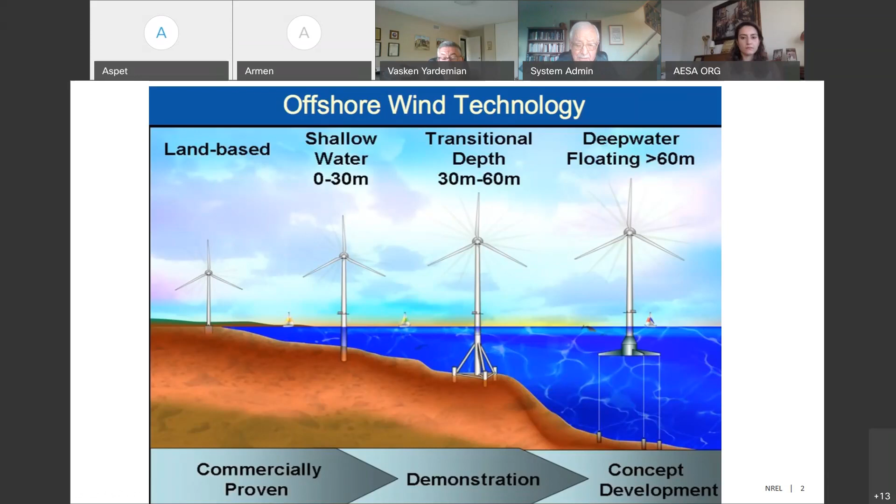And that's what I'm going to focus on. Before I do that, here is a simple introduction to what a wind turbine is like. Notice that it has several parts: the tower, and then there's a nacelle. This is called a nacelle, which contains the rotor, the gearbox, generator,

and the new ones have in them power converters and also transformers. They can fit in there. I'm going to show you a picture which would absolutely floor you how big these things can be.

Then, of course, there's the hub, as you see, and the three blades. The blades are airfoils. They use lift to turn. They turn at between 30 to 60 RPM, rotations per minute, which has to be increased. That's why you need a gearbox from 50 or 60 RPM to what the utilities want, which means 1500 or 1800 RPM. So that's basically the essence of the wind turbine, both onshore and offshore.

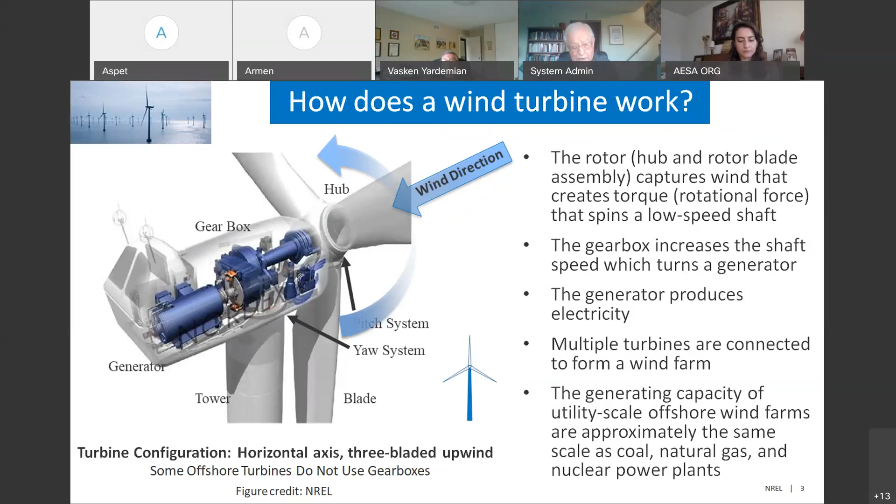So that's the first picture. Now the next one is really another tutorial. Look at the waves here. I'm not going to talk about waves. I bet you're going to ask a question. Keep that in mind. What do waves do when you put these turbines

offshore? Power in the wind is the cube of the velocity. This is the line. In other words, when you turn it on, when the rotors turn it on, the V cube takes you up to a point where you have what's known as the design feature of that particular turbine.

At that point, the blades change their pitch and, instead of increasing the speed, they remain constant. So the curve goes all the way to the end, and then if the wind gets too high, it cuts off. So the rated power, in this particular case, is 6 megawatts. At 6 megawatts, the pitch control comes in, holds things more or less constant until the very high winds, after which it gets cut off.

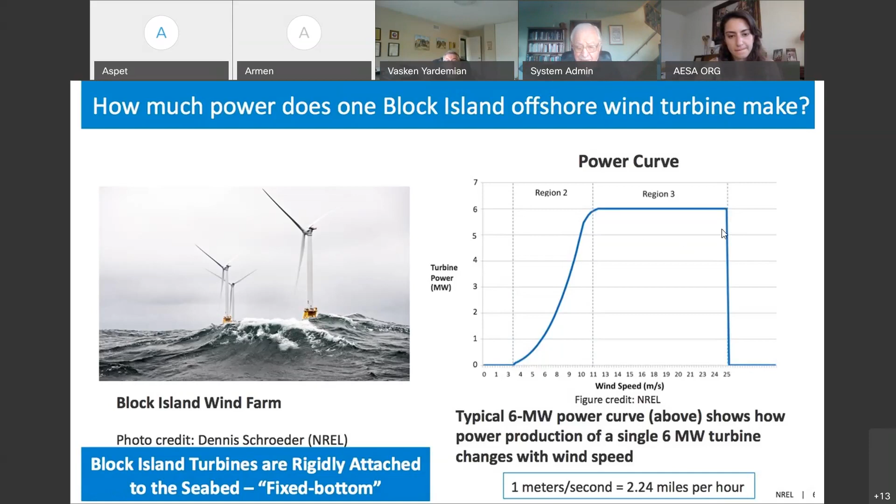So that's basically the feature of the wind: cube of the velocity, and also the area of the blades, directly in the area. So you multiply those two and you get your power in watts, kilowatts, or megawatts. So that's kind of the basics. Now this is a slide which shows what's happening in the United States.

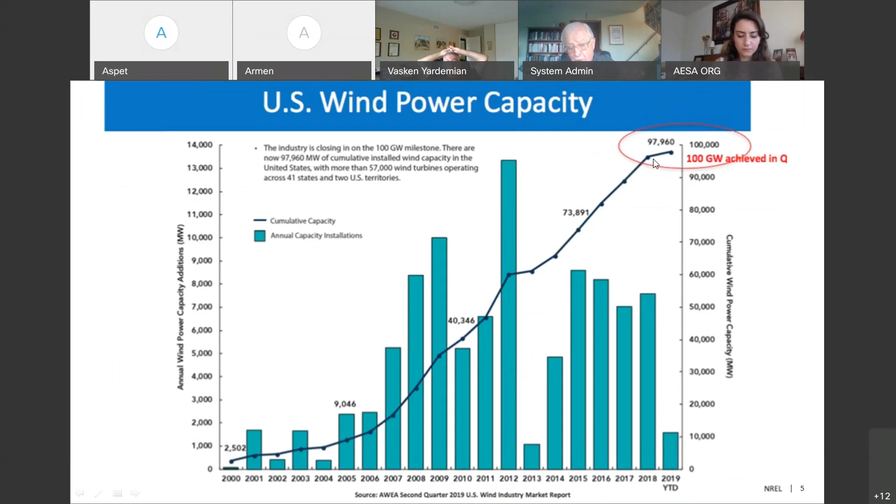The bar charts are annuals, but the curve is cumulative, and it goes almost to 100 gigawatts. That's where we are today in the United States, which means a lot of effort is going on. This is both onshore and offshore combined.

But we always have visions. Wind energy supply in the US could go to 20%. Right now it's close to 8-9%. By 2030, it probably will be 20%. And who knows, thinking big, by 2050 it could be 35% of the electric demand of the country. That's the vision we have.

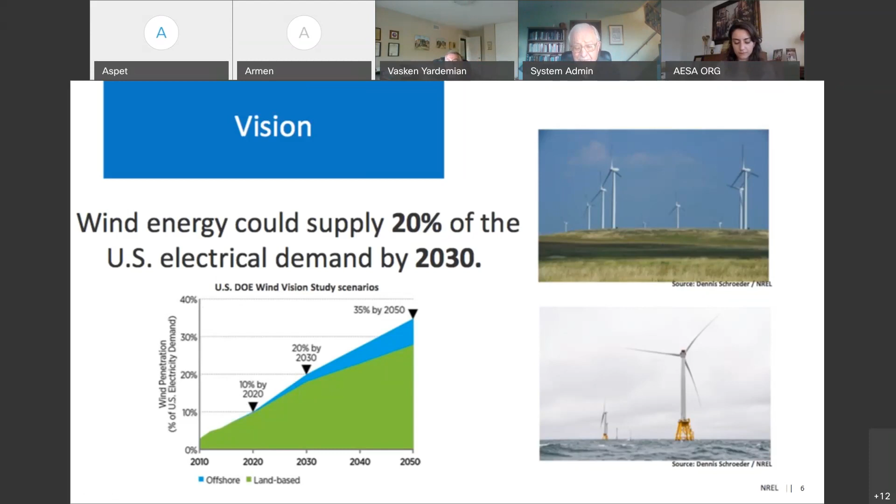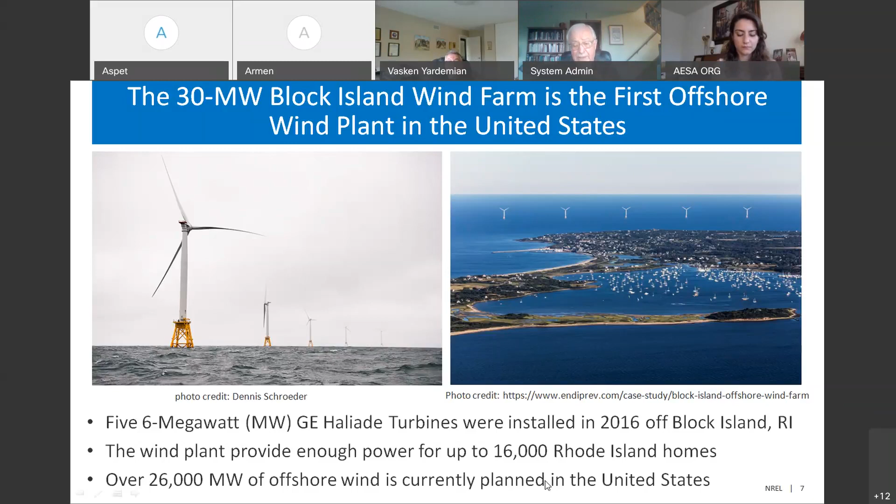Here is where the real interesting story starts: offshore. Onshore is simple and easier to do. Offshore, you've got problems to think through. The simplest is fixed bottom offshore. You fix a monopile into the seabed, or use a 4-legged jacket, and those are cost effective.

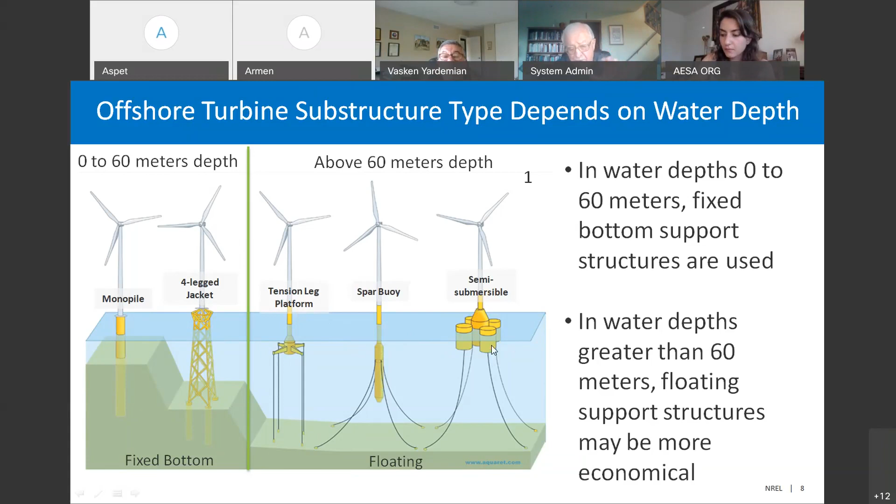But when you go further, to 60-meter depths, you cannot use fixed bottom. You have to use floating, and that's where the fun comes. There are 3 different types of systems to float these turbines. One is called TLP, tension leg platform—I'll show an interesting example. Another is huge spar buoys with tremendous buoyancy, and then the semi-submersible. These buoyant forces keep the heavy, big turbines up and steady, and we'll see how this goes.

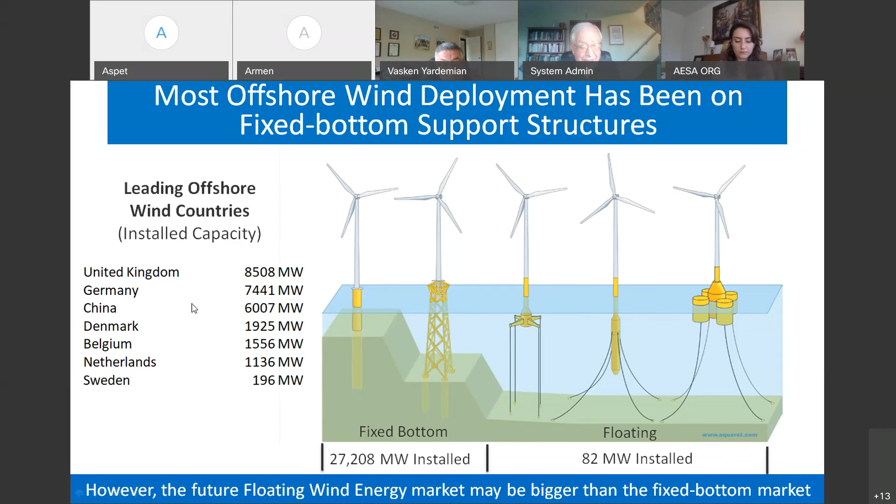Things are going so fast—these numbers came to me 6 months ago and they've already been updated, all of them. That's how fast things are going. There is right now 27,208 megawatts fixed bottom and 82 megawatts floating installed in various countries, and I'll show you where they are. Look at the numbers—Germany is very strong, one of the leading countries in wind farms.

This slide shows the coasts where your winds are steady, more or less, with minimum or average speeds of 7 meters per second, proper for generating electricity cost effectively. All countries, all continents have coasts, and this shows where some of them are going. Interestingly, 80% of offshore wind resources are in waters 60 meters or greater—that's where floating systems come in. This technology will be completely deployed within 4 years; in fact it's already being deployed, so it probably will be closer to 2023 to reach the targets we're looking at.

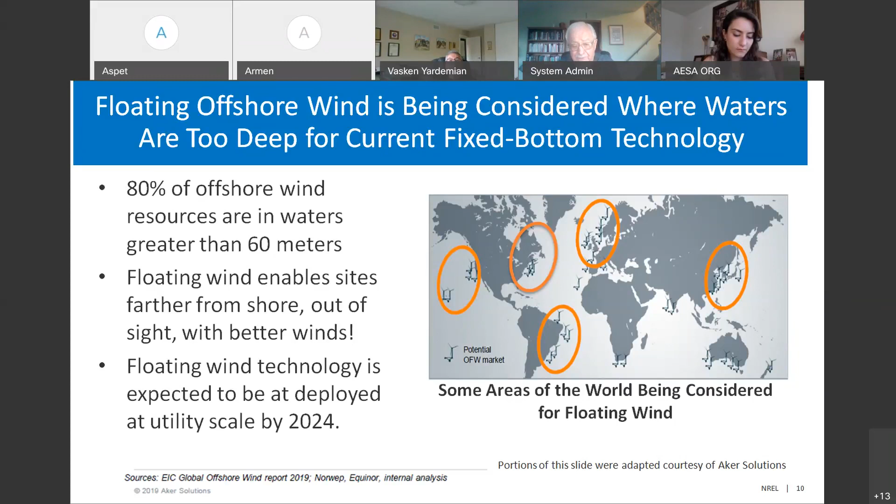This is a US wind resource map, and the colors show wind speeds—darker color means higher speeds. You want higher, steady wind speeds. You see the shorelines have dark blue, where wind speeds are enough to make it cost effective to put wind turbines. The rest of the colors show turbines used in various onshore places.

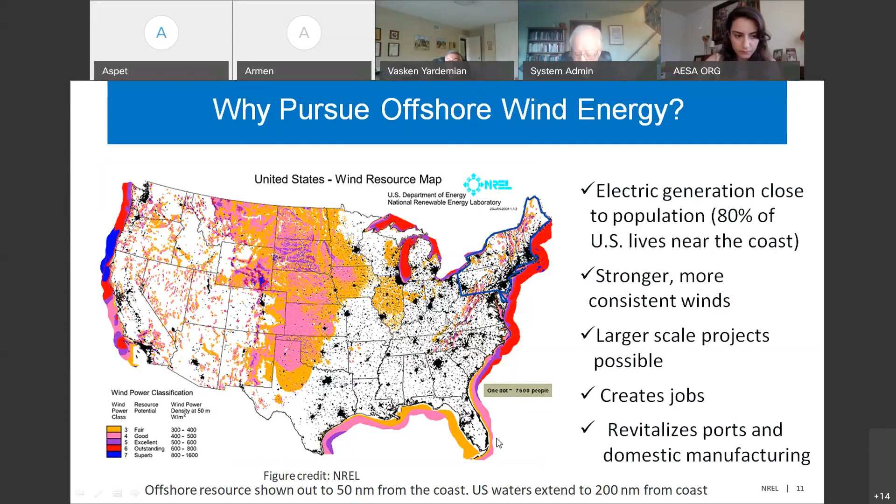Now let's look at offshore. The best location is south of North Oregon and Washington State, and even better ones are on the East Coast. These very dark areas show 10 meters per second or more—remember the average has been selected at 7. Actually, some turbines are set at higher speeds because they're steady and maintain that speed year round. That's how you do your selection.

You have to be very careful where you locate your wind farms—that's the first and most important thing, finding the best location. You don't want to go too far into the ocean because it's expensive; you want to stay within 60-meter depth, which is about 200 feet—you wouldn't want to go too much beyond that. One of the most important components of the wind turbine is the blade. These are airfoils.

What you see here, in 1980, this blade was really a wing of an airplane that created lift and rotated at speeds 50 to 60 RPM. Since then, there's been a major development: much more slender, better designed blades that do two things.

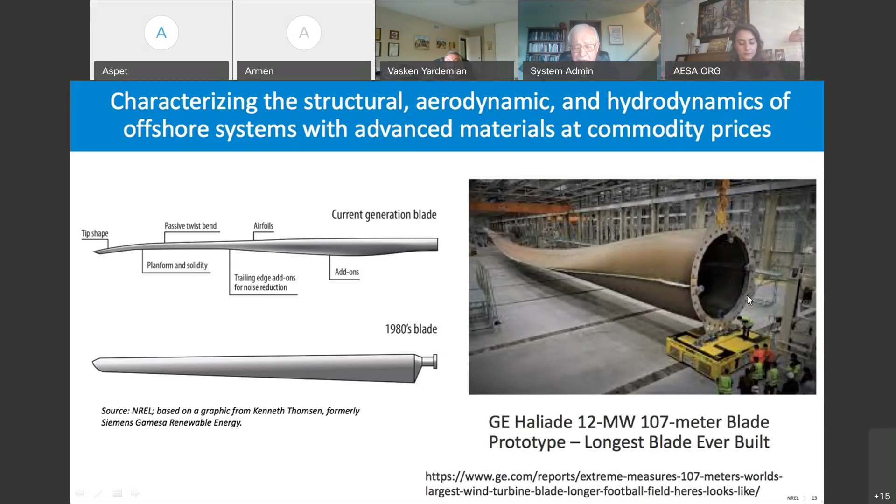the sea. That's one of the reasons I'm going to mention again - that offshore is the direction these big turbines are going. The transportation is very hard on land for those big ones.

Okay, this is kind of a repeat. You have the spar buoy, you have the submersible type, and then the tension leg type. All of these are used as they put these wind turbines at sea.

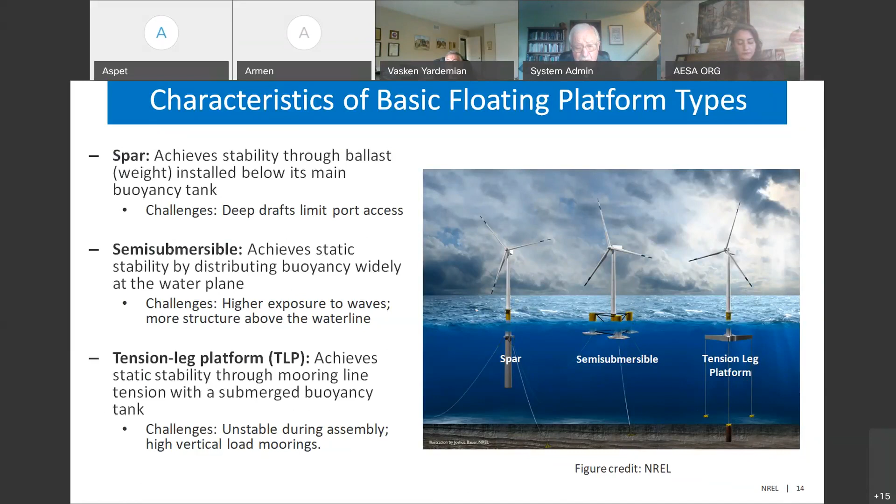Now, this is very important. You have already seen the oil and gas rigs that float. What they float on is precisely the same thing the wind turbines have, much smaller. It's very nice in knowledge transfer - you didn't have to do a lot of work on that because it's already been done with oil and gas rigs offshore.

Then inside the ocean, of course, you have your turbines. I see the turbines here - they usually carry 66 kV. These are dynamic cables that go to a station here. There's an anchor involved and the floating support. So this is roughly the inside of a wind farm.

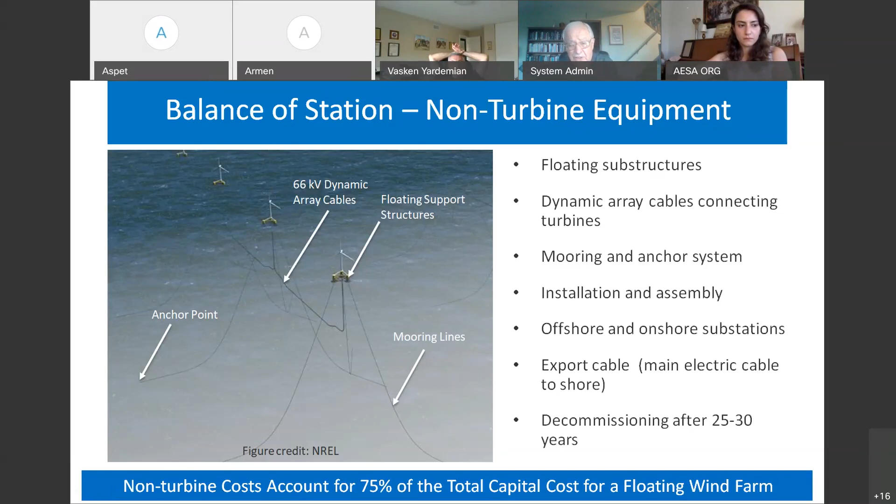These wind farms offshore, remember, can be as many as 80, 100, 150 turbines. And so the electrical connections and the power load and all that is a whole different science of wind turbine, which has nothing to do with the turbines themselves - it's basically an electrical problem that you have to deal with.

Now here we are. What is the cost breakdown of floating offshore wind systems? I'm not going to tell you how much they cost - you can put that in your question, we can discuss that. But here is a good breakdown. Notice that the turbine itself is only 24%. 25% is the substructure, the foundation, the floating - all that costs as much and slightly more than the turbine itself. Then there are the other problems.

The electrical infrastructure is 18%. Assembly and installation, which is another interesting topic, we'll leave for the Q&A - how do they erect these things in the ocean is really fun to watch, and it's really a science now. And then a lot of incidentals that make up the cost of a single offshore wind turbine.

Okay, now let's look at the bottom of it. You have to anchor this - the floating part is here, but then you have to anchor it so it won't move away with the waves. And the anchor, look at the anchor here - this is a regular heavy anchor which ships use, and it goes deep into the

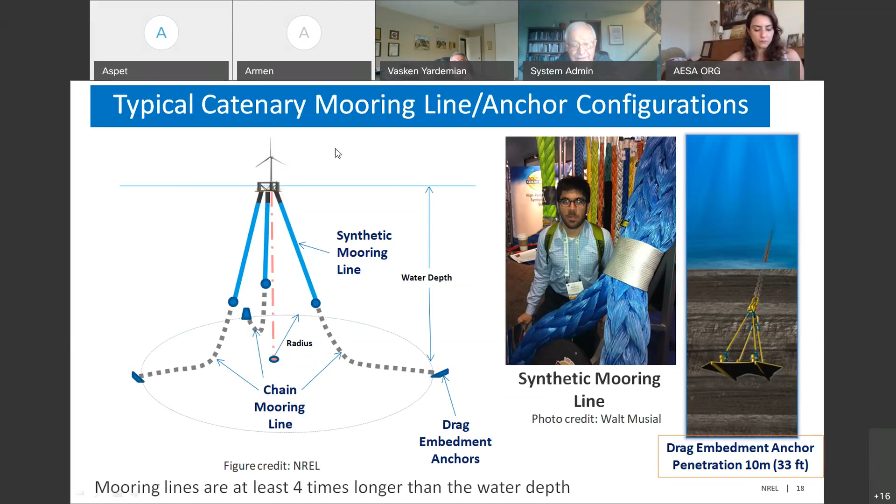seabed to hold everything firm. So the top part is synthetic mooring line - here's a polymer used for that. And then the other is chain links with anchors, 3 anchors. Now, all this length is longer than the depth, and I'll show you why that's the case.

We're setting up a turbine. This is just a schematic of a wind farm. Here is the wind farm and how you connect all the turbines, bring it to an offshore substation platform. From there, you send it to a 115 kV cable onshore and then connect it to the utility. Utilities are very much interested in integrating these turbines into their system.

This slide is a little complicated. This is what Vahan Gevorgian created, and he won a prize for it - a controllable grid platform. How do you control intermittent and changeable inputs from renewable energy like wind, solar, and so on, and connect it to the grid? He came up with a system which is classic, and it can be used anywhere for utilities to check against whatever wind farm they have to connect to.

This particular one shows 4 wind turbines. You use the solar PV system and 2 battery storage systems, because sometimes you have to store your energy.

This line here is the utility line. The Xcel is a Colorado utility system. The red is the test one, and you combine them. You get the input from all these and match it against what the utility wants, bring it to a switch, then connect it to the Xcel utility.

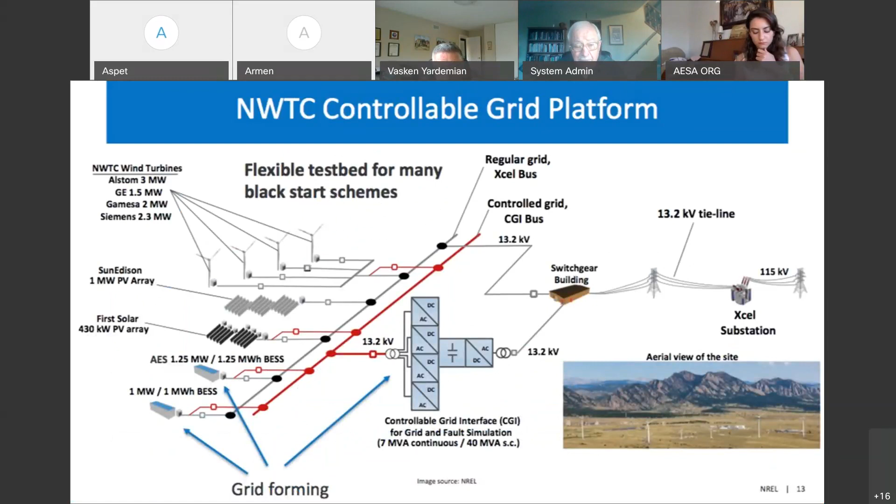The lower picture here is our NREL wind turbine test site. All wind turbines come here for testing, not the very big ones. The biggest, I think, is 3 megawatts for NREL. That's all I'm going to say about this, because this is a whole presentation of how you do this. If you're really interested and have good electrical engineers, you would love to hear my wonderful friend Vahan Gevorgian, and he will be glad to oblige.

Now, one of the many problems you have with wind farms is, how do you space them? Here is a sketch, which is not quite correct, because what you want to do is stagger them. There's a special distance you keep between turbines, but then the next set is staggered, and so on. The rule of thumb is that if this is the first turbine, the second turbine should be 6 to 8 rotor diameters away, so as not to interfere with what this wind turbine is producing. So arranging a wind farm itself is an interesting engineering project to work on.

You don't want them too far from each other, because then you have to spend a lot of money on high-powered cables going from one turbine to another. So it's a cost-effectiveness study: how close you can bring them so they won't interfere, and how far you can place them so they stop interfering with each other.

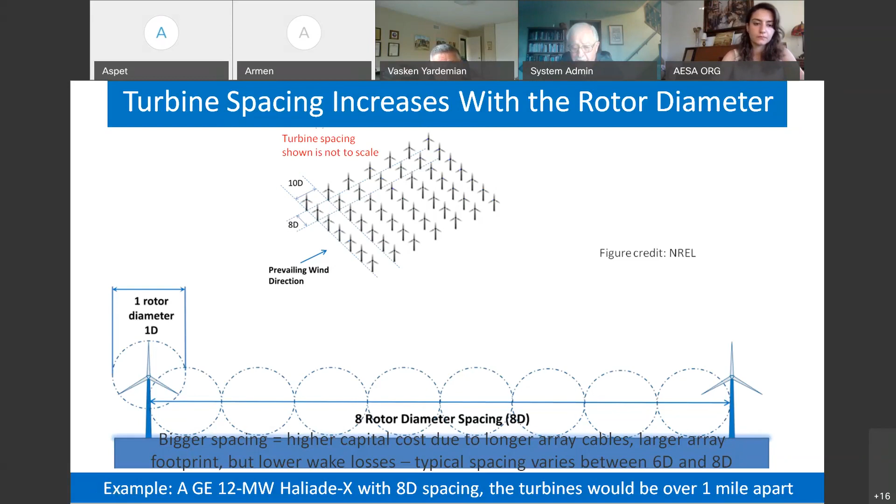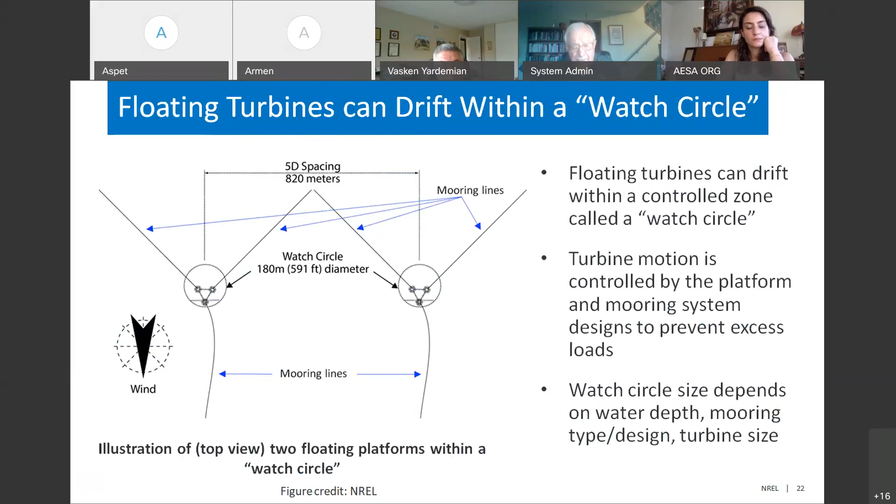Interesting problem. The next issue is you want these turbines to move a little bit. It's called a watch circle. It's a 180-meter diameter circle, so the cables are made loose enough that the turbine can move in a diameter of 180 meters. Almost all offshore wind turbines have this special part, and the mooring lines are made to allow this kind of motion. You don't want to go more than that, but that's about the amount.

Then all these turbines send their power to the substation in the ocean, mostly the ocean. The wind farm collects the power, they're floating, and then they transfer this onshore, which then connects to the utility. That's roughly the picture you face.

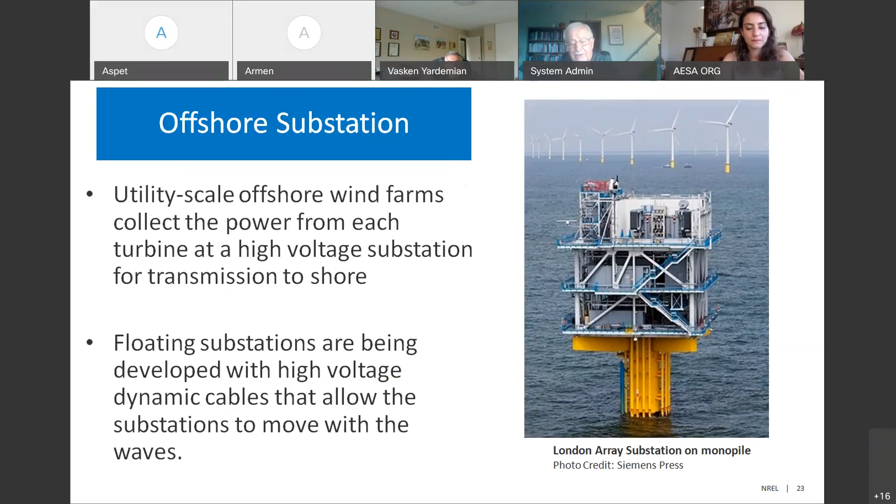All right, next is operation and maintenance. All of these turbines require operation and maintenance. At sea, you have a tugboat that comes, and a special ladder, actually mobile, that goes all the way up to the nacelle to do anything outside. To do inside, there's a door. You go inside, and there's a crane that takes you up to the top of the nacelle, and you can work on the generator, you can oil it. It says here: sensors, computers, lubrication, electrical, preventive maintenance.

All is done on site, but if there's a major repair, then you have to take the whole thing on a tugboat and carry it onshore for work. Hopefully not much falls in this category. Incidentally, these turbines are built to operate 20 to 30 years. Keep that in mind, 20 to 30 years.

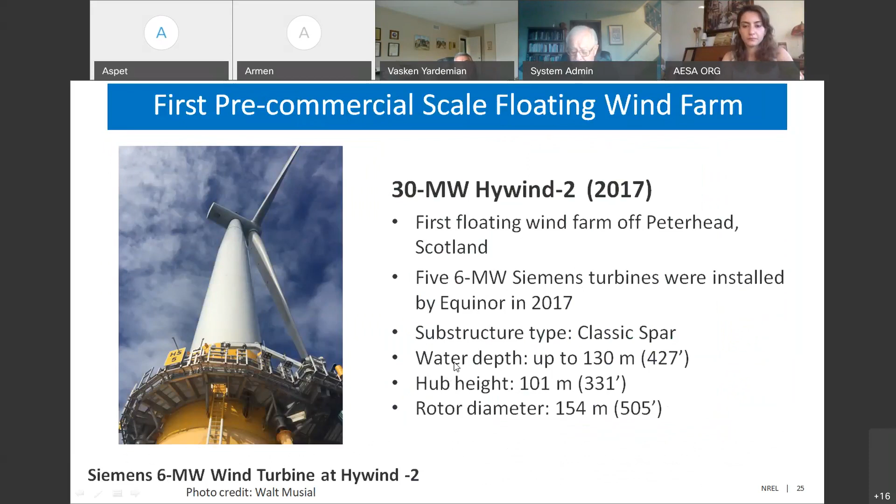So far, the earliest was in 2012, so we have 8 years on them, and they're performing very well. There's such an advance on these turbines that maintenance is minimal, major maintenance is minimal. This is the first floating wind farm, done in Scotland. It used Siemens 6 megawatt turbines. Just for fun, I wanted to show you that.

The generators used in the nacelle, one of them is called the permanent magnet synchronous generator, which requires permanent magnets. The big turbines usually use that, not the induction generator. And guess what? 99% of the permanent magnets come from China.

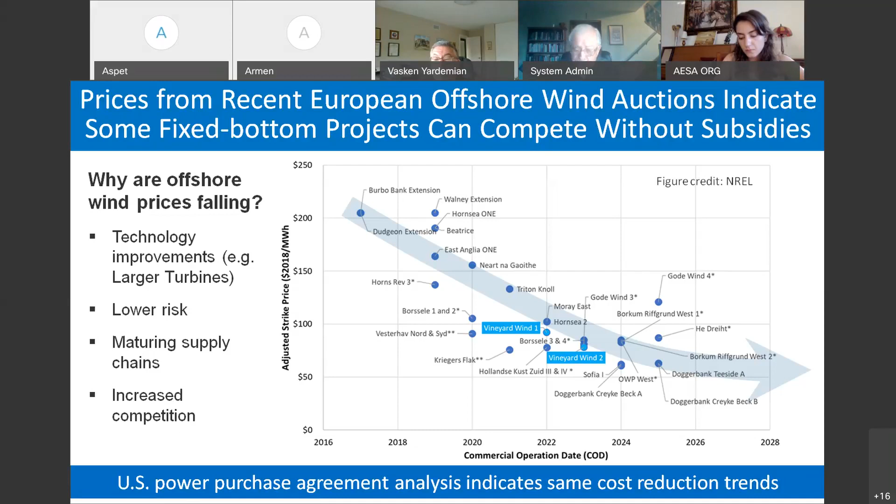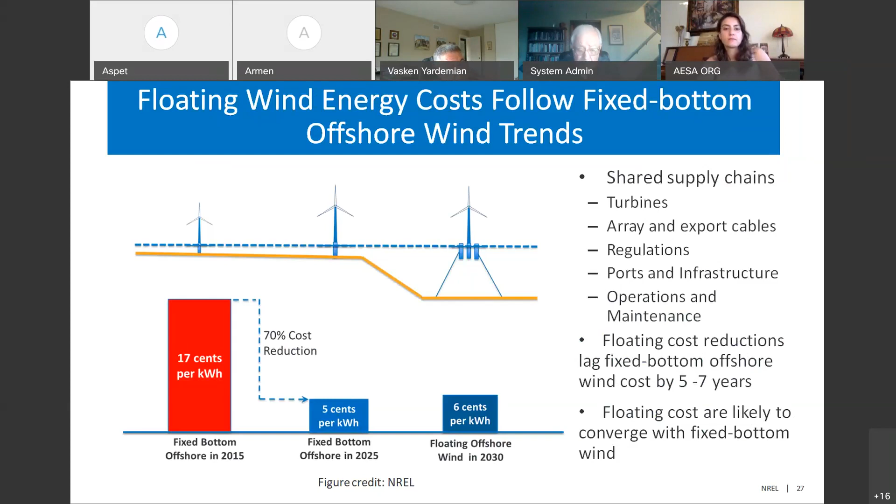We'll discuss the subsidies separately. For wind, the subsidy right now is 2.3 cents a kilowatt hour, subsidized by the government. It's called PTC, Production Tax Credit. It will expire next year. After that, Congress will either renew it or say you're mature enough, you don't need it. In fact, I believe these turbines are mature enough, we're not going to need any more subsidies from the government.

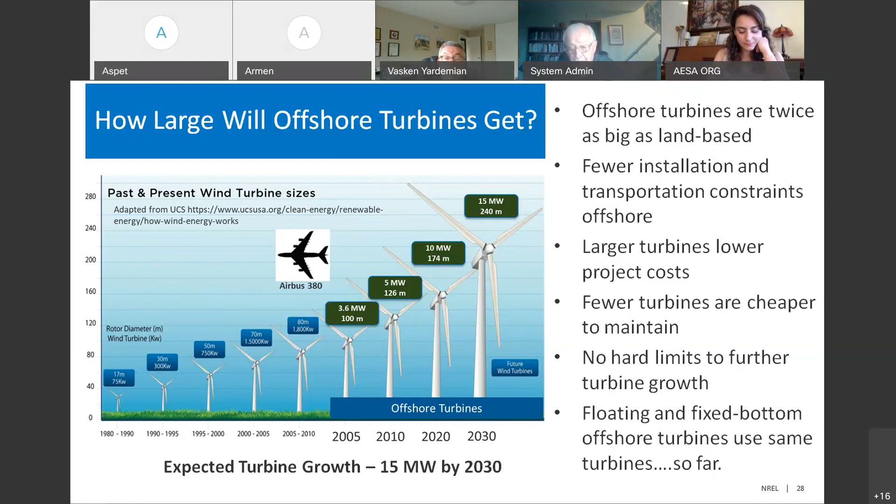And here is the comparable Airbus 380 picture to show you that these are huge. I can't even believe now that you can have a 10 megawatt - actually, we have 10 megawatt wind turbines offshore. Fixed bottoms are easy. Remember, floating is where the fun comes.

Very brief summary: there are policies that we have to deal with, then the cost estimates they have to make. This is 60 megawatt hour, this is 6 cents a kilowatt hour - this is the target for the offshore turbines. But the big thing here is the lower one.

Significant challenges remain with grid integration - that's a big, interesting problem. Resource characterization: where are the winds? Where do you put them in the ocean so that it's accessible and the winds are relatively steady?

New technology development is needed for unique environmental conditions like water, ice, hurricanes. Don't ask me what you do in hurricanes for wind turbines. If you notice the map, there will be no wind farms outside on the coastline of, guess what, Florida. No turbine can stand the strength of a hurricane. That's why you go northeast, where environmental conditions are a lot more benign.

I don't know how many of you have seen this movie called... The Perfect Storm. It's an incredible movie. When that happens, you lose your turbines, but that's a 1-in-500-years system, I hope. So that's why you have to select a place where you do not have very high winds that can destroy the turbines.

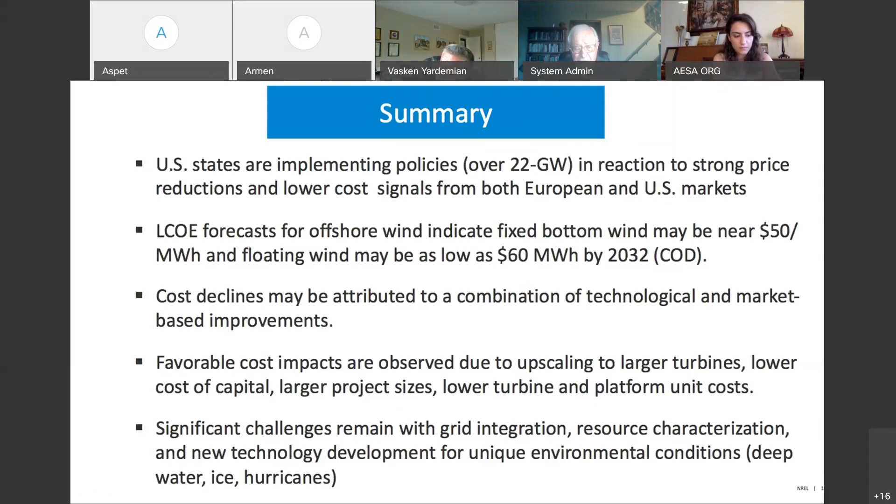Okay, now let's go to the meat of it, a few short slides. What are the advantages of offshore wind? Windmills can be built that are larger and taller, and transportation is easier. They tend to be far out at sea, thus they're less intrusive as far as borderlines are concerned, because many onshore turbines are very close to the boundaries between two countries, and that can create problems.

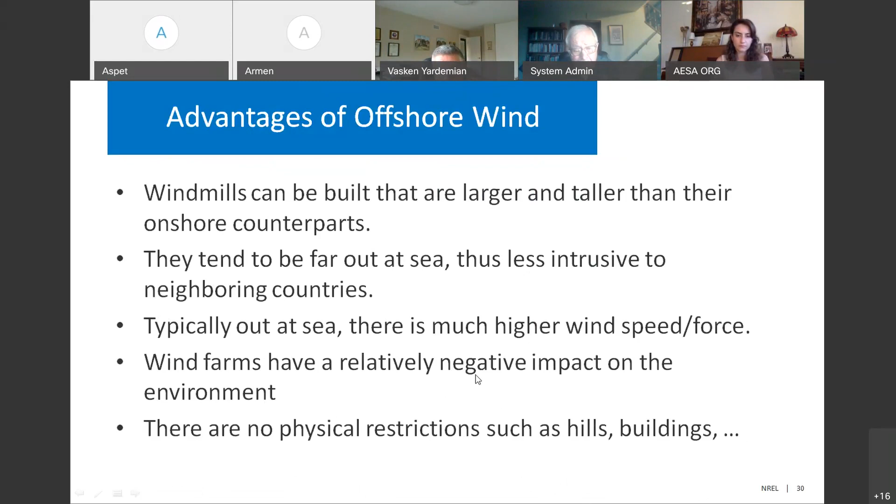Wind farms have a relatively negative impact on the environment. That's why taking it out to sea minimizes that, but it creates its own problem. There are no physical restrictions such as hills or buildings, so you have steady winds blowing. The impact they may have is - let me go to the next slide, you'll see that.

In the disadvantages, the biggest disadvantage of an offshore wind farm is the cost. They're more expensive than onshore. So that's why the competition has to bring the price down.

The effect of offshore wind farms on marine life is not well understood. I'm sure that will be one of the questions - how about the marine life, what do they do? That isn't tested enough. So that's one big question there, to see how marine life is affected by offshore farms.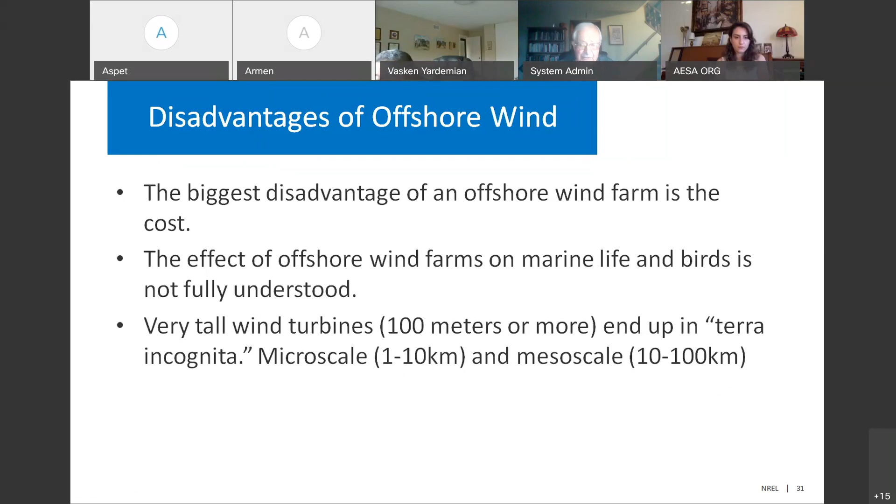Very tall wind turbines, 100 to 200 meters, have a very interesting new problem in atmospherics. Above 100 meters, especially with the blade being another 100 meters, giving 200 meters, your atmospheric conditions move from microscale to mesoscale, and microscale winds are different than mesoscale winds. So you have an additional problem analyzing your wind flow to design and place your turbines. If there's too much difference, that's one of the conditions you have to stay away from.

Now, to me, the funnest part is, wind is bad enough to describe, it has its own mind. It blows sometimes, it doesn't blow other times. On ocean surfaces it's a little more predictable, but now you have an aero, hydro, servo, elastic system problem to work together. In other words, you cannot isolate your wind predictions from the hydro behavior, water behavior, and the elastic systems. The blades are very elastic, the turbine blades, and all of those influence each other. So far there is no good model that combines all of this.

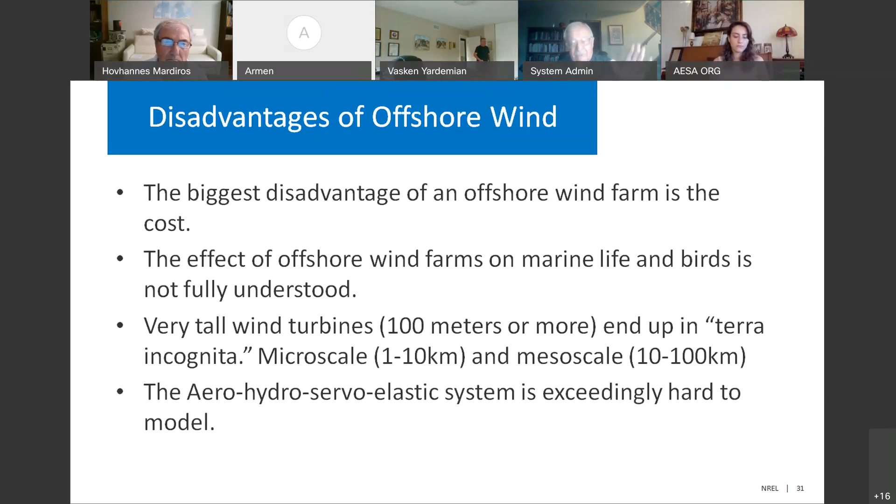So this will be for any new person who wants to go into aerodynamics, hydrodynamics, or wind turbines. This will give him a tremendous opening to spend the rest of his life working on this system.

Okay, now let's go to the onshore farms. Cost of onshore wind farms are relatively cheap, so that's an advantage. The shorter distance between the windmills onshore are a little shorter than they are in the ocean, because of the waves and the effect of one turbine or another. So if they're closer, there's less voltage drop from one turbine to another.

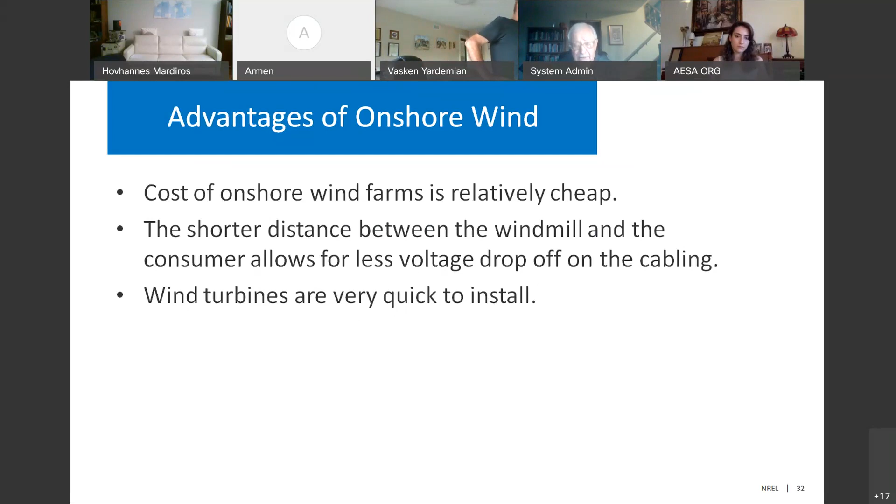Wind turbines are very quick to install. Let me make a point here, and we'll discuss this in Q&A - you can install these in just a morning, just half a day. They say these are turnkey. Remember, these wind turbines are turnkey operations, so well arranged that you can really assemble them quickly. It's easier on land than it is when it comes to oceans.

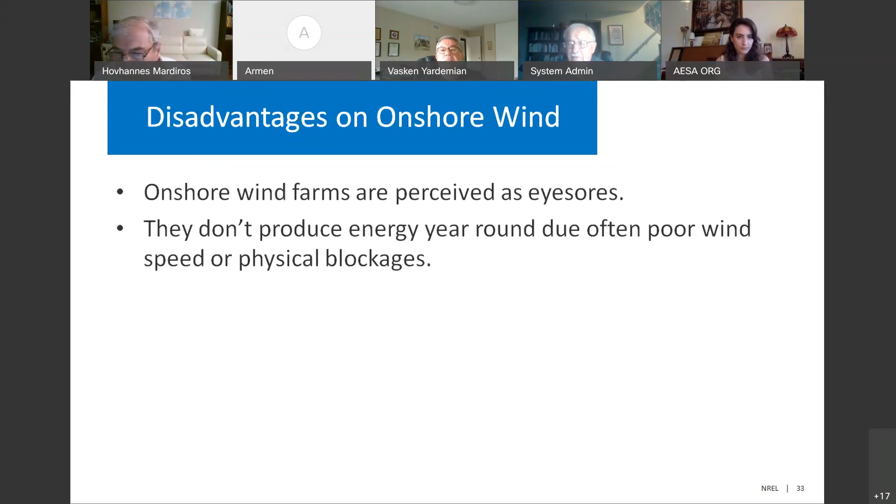What are the disadvantages? Onshore wind farms are perceived as eyesores. To me they're beautiful, I love to watch these things turn, but a lot of people think, hey, look at your utility towers - those are the eyesores, not the wind turbines, but it is a problem. They don't produce energy year-round because of blockages - you always have blockages wherever you put them, unlike offshore.

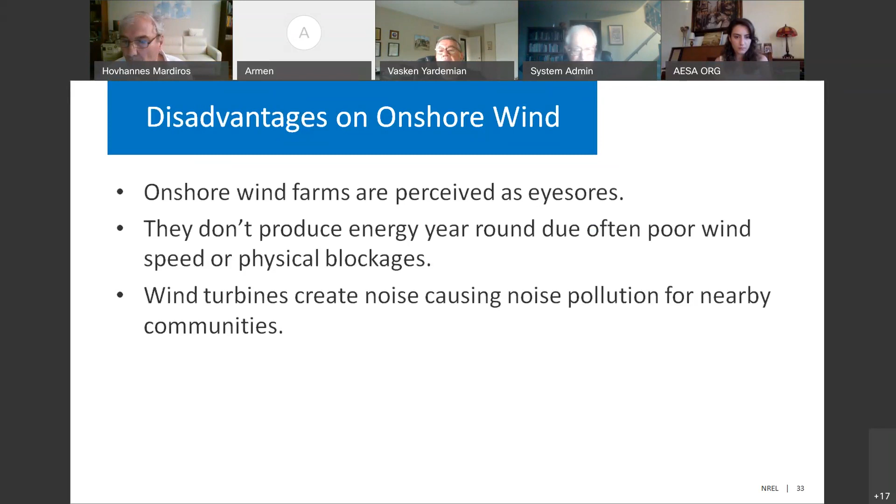Wind turbines create noise, causing noise pollution, and communities complain. All right, that's a problem, that's a disadvantage. So that's where I'm going to stop and give you just a quick look at who are these manufacturers.

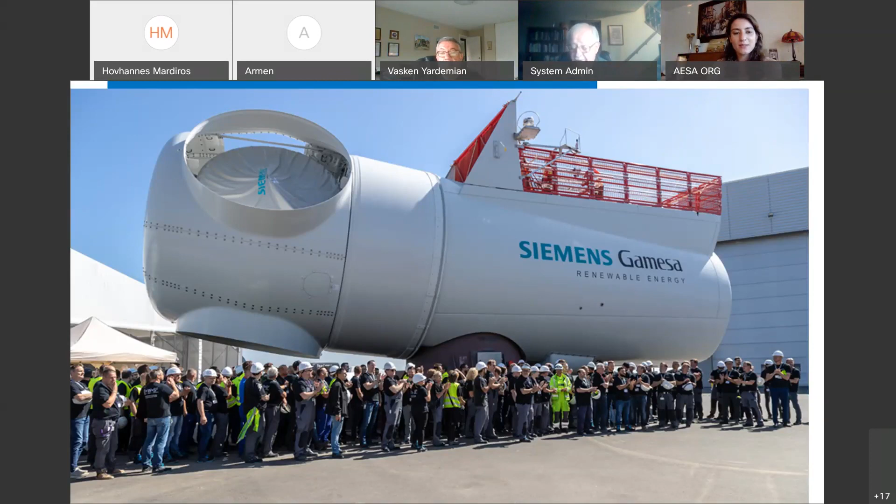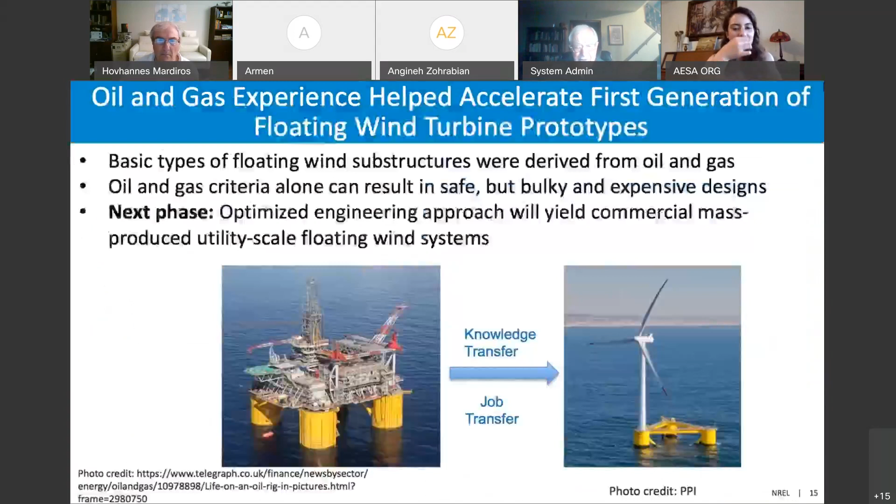How far away are we from being able to do that? Is that possible for the US? I don't know, your guess is as good as mine. But there's enough variables in that circle I showed you to play with. There's always a contingency for it - construction finance, if you can get good finance, the prices go down.

Nobody asks about decommissioning. When they're finished, what do you do with these turbines? 90% of a turbine is reusable or recyclable. The big problem is the blades - because they're composites, you have to chop them into pieces, and there isn't a single factory where you can take a 100-meter blade and chop it. So I think we have 10 more years to think about what to do with it, until they're 30 years old.

The cost roughly of these turbines is $1 million to $2 million per megawatt. They're not cheap, they're expensive, but they're well funded. They're competitive, and soon they will return money on investment - we are there now, or close to it.

Could you comment on the cost comparison between solar and wind power per kilowatt hour? It should be about the same. Photovoltaic power generation is now almost 1 cent a kilowatt hour. It started at 40 cents a kilowatt hour when NASA started it, and it's down to 1 or 2 cents a kilowatt hour - they've really improved on it. But the problem with solar is you have to have storage, because at night you can't use solar, whereas the wind blows all the time, especially in the evenings. I'm told a 5 cent a kilowatt hour wind turbine is competitive with fossil fuel and solar cells, and I think that's about right.